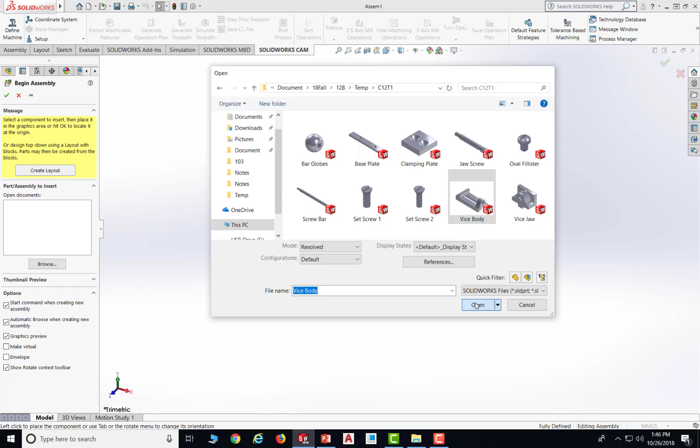Let's grab the first part, the vise body, as our first part, and say open. Now SolidWorks is going to ask us to drop the first part. Whenever you drop the first part, that part is going to be fixed, which means fully defined. So the position of the part is going to be fixed and you cannot move it anymore.

So this is our first part. I just click and put it here, and this part is going to be fixed. As you can see, it has an F in front, meaning this is the first part and we make it fixed.

Now let's grab another part to drop it in. But before we do that, let's take a look at the step to see where we are and how to assemble. This is the part we just put down. Next, we're going to select this part and put it in there, and assemble this piece onto the body. So let's go back to SolidWorks and bring in that part.

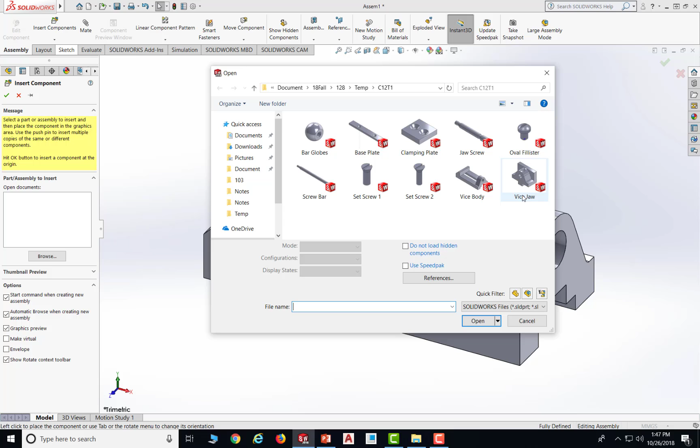So we go to assembly and select insert components, or you could use the drop-down here for insert components. It will pop up the same folder automatically. Now we are going to bring in the vise jaw, say OK, and drop it anywhere. We are going to add mates so the part becomes fixed. As you can see, it has a minus sign in front because it's underdefined, so we are going to add some mates to make this part fully defined.

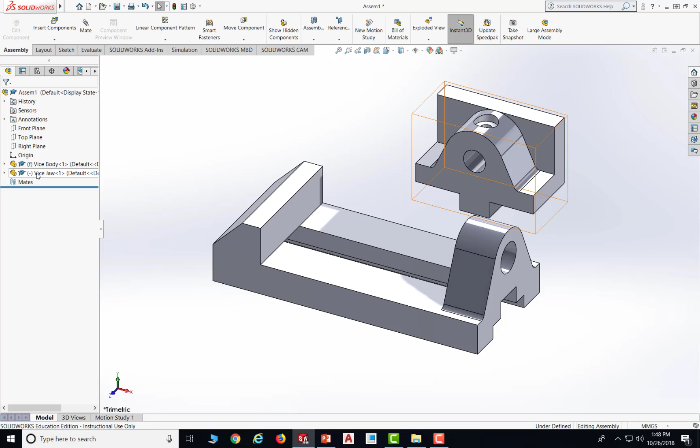First, let's make the two surfaces mate together. We are going to select the bottom surface here and mate it with this surface. Then we are going to select this side surface and mate it with this surface. Then we are going to give a distance so the part can only move from here until this edge. So we are going to go ahead and give this three mates.

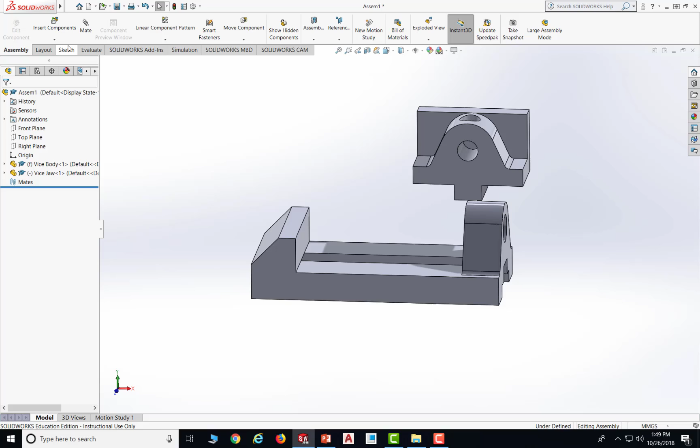As the first mate, there is a mate option under assembly. Click mate, and now select the surfaces. Like we said, we are going to mate the bottom surface here with this surface. So let's go ahead and select these two surfaces.

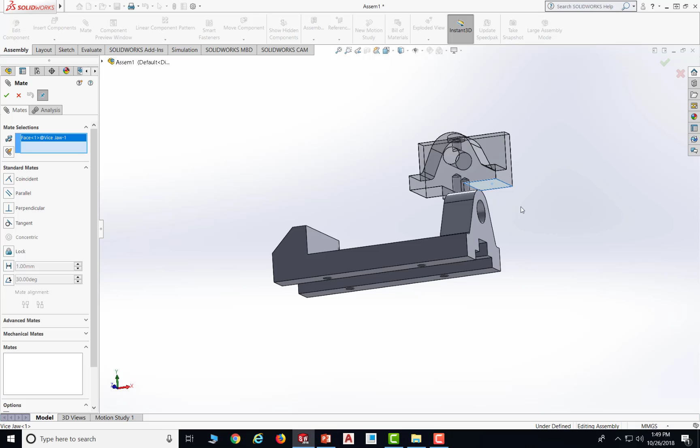Before you do that, make sure this part is dark so you can select the surface. I am going to select the bottom surface as well as this surface. Now they are mating up, and say OK for this.

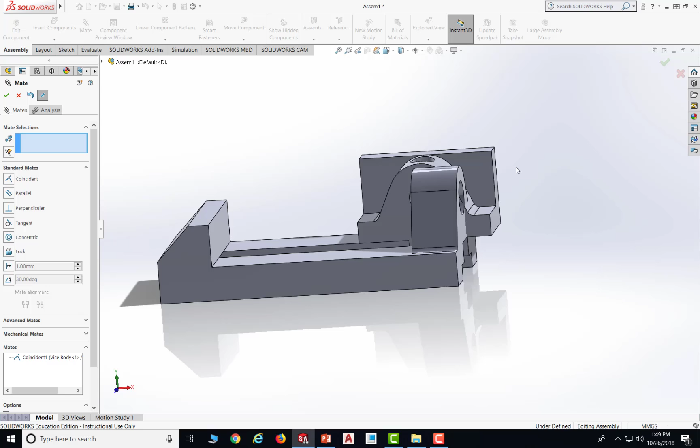Then I am going to create another mate. The mate option here is highlighted, so I am going to select it. By doing that, the part can still move in this direction because I only had one mate so far.

Next, I am going to mate this surface with this surface. I'm going to click this surface as well as this surface, and say OK to this mate as well. By doing this, the part can only move in this direction and can't move front and back, only left and right.

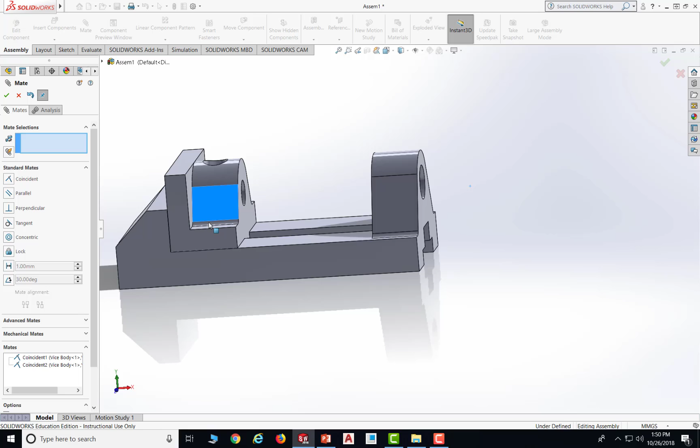The problem is it can still move out, so we need to add another mate to make the part only move within these two distances.

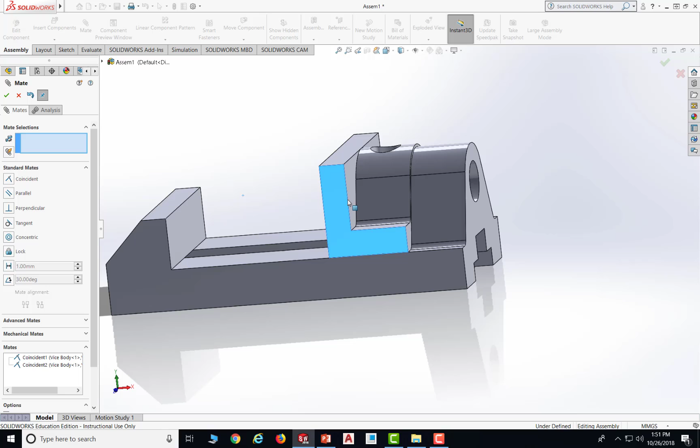Let's go ahead and select another mate. This time, I am going to select this surface with this surface and set the distance so it can only move up to here. Let's select the surface, this one, and the other one here.

Now let's go to the advanced one. There are the advanced mates.

Let's open this up and go to distance. So there's a distance here.

You click that distance and it will have you input the smallest distance and the biggest distance. The smallest distance between these two surfaces is going to be 0, so let's tap 0 there. The largest one is going to be until this position right here.

Let's figure out the dimensions. If we go back and look at the dimension, the maximum one is going to be 144 minus this thickness, which is 16 plus 10, and minus this distance, which is 22, and minus the thickness of the vice jaw. Let's take a look at the jaw - the thickness of that is 32.

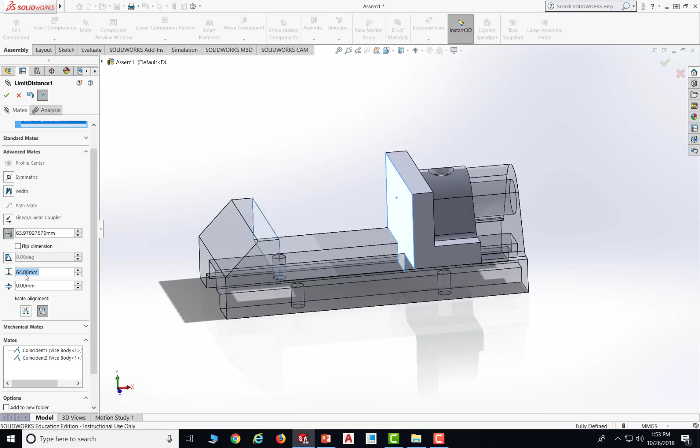So let's put all those dimensions there, which is 144 minus 26 minus 22 and minus another 32. Let's go ahead and put this number there as our maximum: 144 minus 26 minus 22 and minus 32, say OK. Say OK for this mate. So the minimum distance is 0, the maximum is 64, and say OK.

Now we can take a look at this part. The part can only move within this space. If you noticed, actually here I made a mistake when I did the sketch, right?

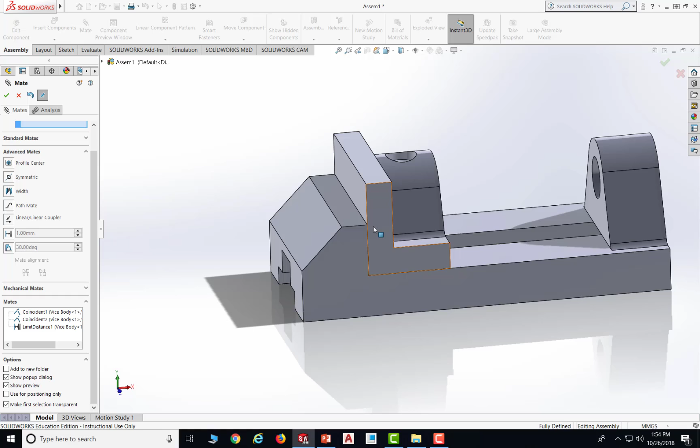Before we do that, let's save the work first and say OK to the mate. Save the work first, rebuild, and save. When you save, make sure you save it in the same folder as all the parts.

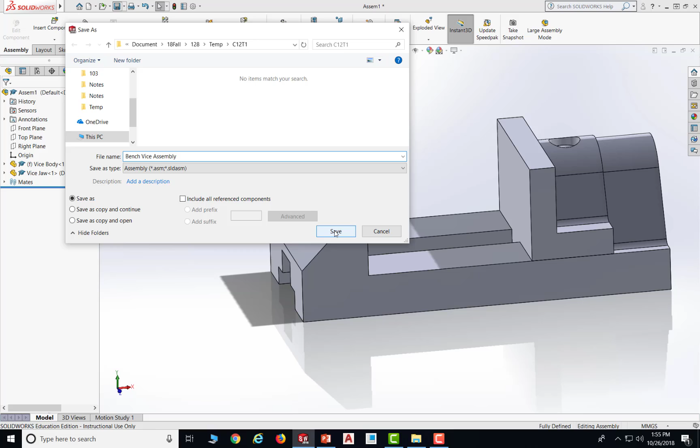Now let's go ahead and change this part. So we go to SolidWorks and open the previous one. Click open - this was the part of the vice body, say open. And this is the part.

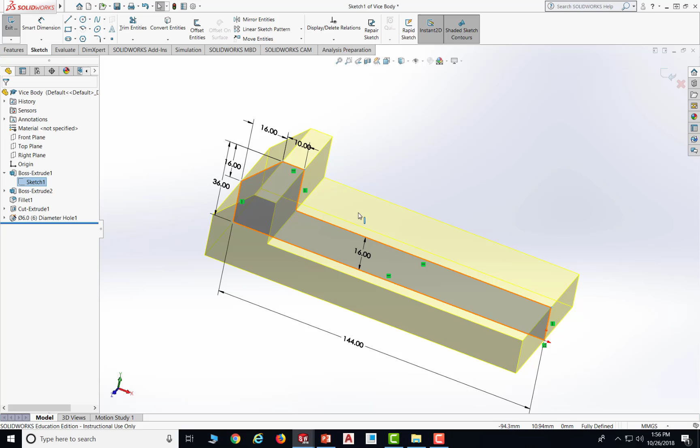Actually, I messed up the dimension there. It's under sketch 1. So I click sketch 1, go to sketch, and select the sketch. Now let me go to the front plane so we can see it better.

So actually the 36 here, I messed up. If we go back, the 36 should be from the top until this line. What I did was from the top to the bottom - that was my mistake.

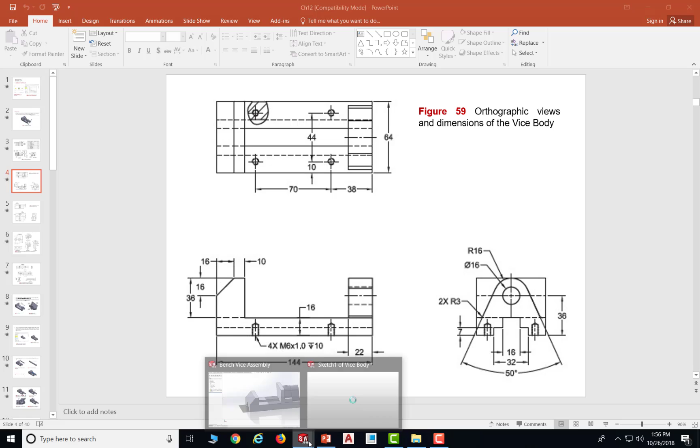So I am going to go ahead and change this dimension from the top until this surface instead of all the way below. Let me go back here and delete this dimension. So this dimension is deleted, and go to Smart Dimension and redo this part and make it 36, and say OK for the dimension.

Then save the work, and it will ask us to rebuild - just say OK with that. And let's look at the new part.

It looks like this, it has a line there. So let's save it one more time and click the sketch maybe and save it one more time. Then that line disappeared, and this is our new part.

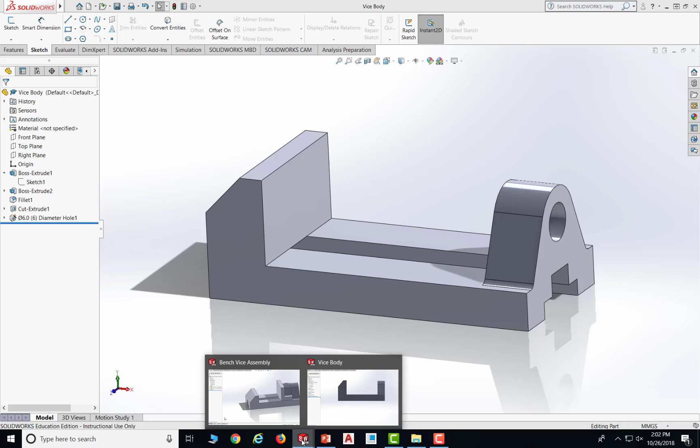Let's give it a good view and save it. Let's go back to the assembly, and it will ask us to update and rebuild - say OK with that. And the part gets rebuilt. Now they have the same height.

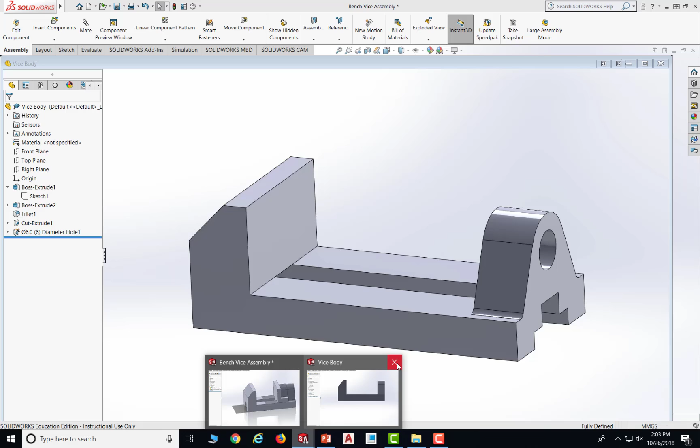Now let's continue. Before we do that, let me close the vice body part because we don't need it anymore, and let's look at what's the next step. So we completed this.

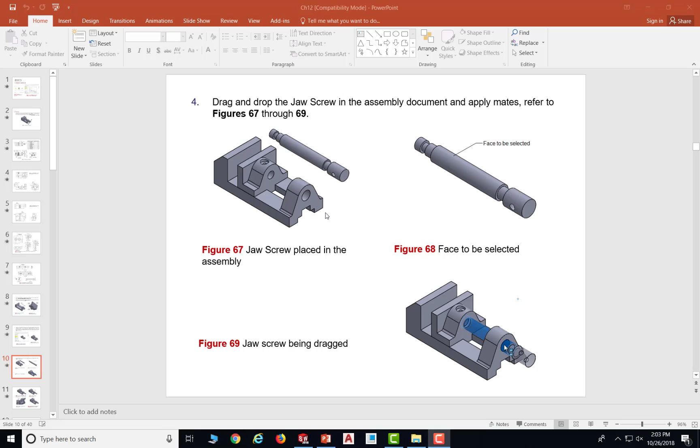In the next part, we're going to bring this part and insert it into this hole. So let's go back to SolidWorks, click insert components, and find the part. Actually, the jaw screw is the thing we're looking for - don't select the screw bar, that's for something else. Select the jaw screw, say open, and drop it off in a random place that you like.

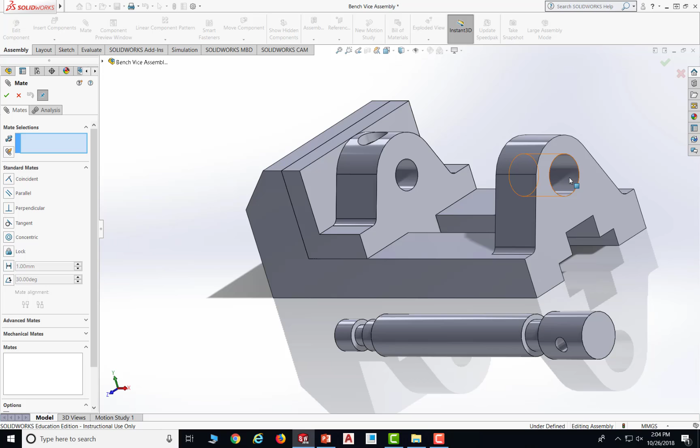Now we are going to put the mates. Let's click mate, and we're going to make this one and the hole concentric. Select this as well as the hole, which is automatically recognized as concentric, and say OK with that. With that, the part will only move in the center of the hole.

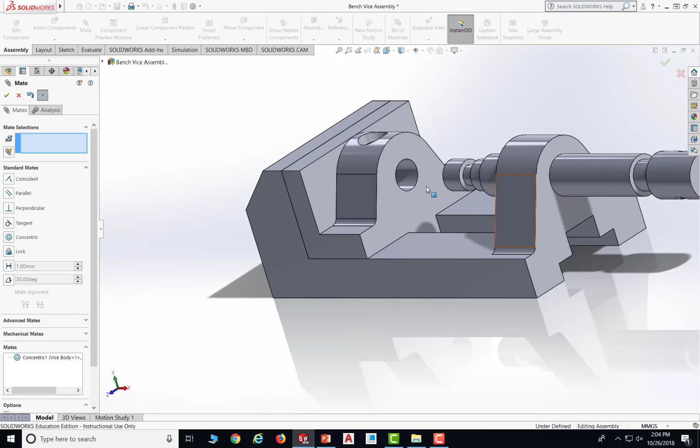Next, we're going to make the bottom, the inside surface, coincident with the surface. So let's select this surface as well as the inside surface, and this is the surface. Make them coincident, which is recognized automatically, and say OK with that, and OK with the mating part.

Notice that by doing that, the vice jaw, which is this part, is fully defined - it does not have a minus sign in front. The vice body, like we said, is the fixed part - it's the part we brought in first, so it has 'fixed' in front. But the screw, the jaw screw, still has a minus sign there.

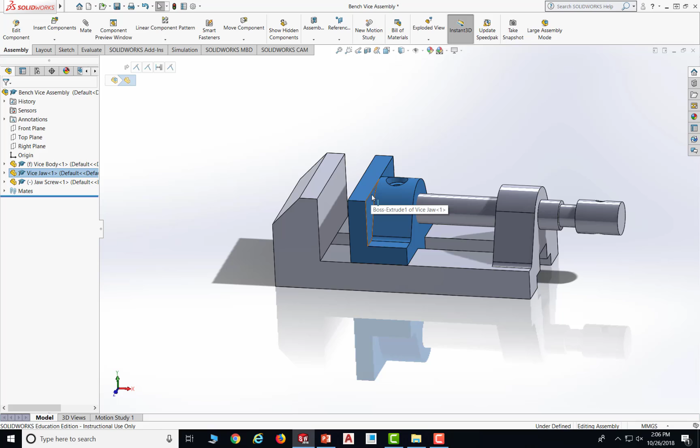The reason for that is we gave two mates there. The bar can still move, as you can see - it can rotate. This is what this part is actually supposed to do in reality. So we are not going to force this part to be fully defined, because in reality we're supposed to have this motion, so we'll just leave a minus sign there.

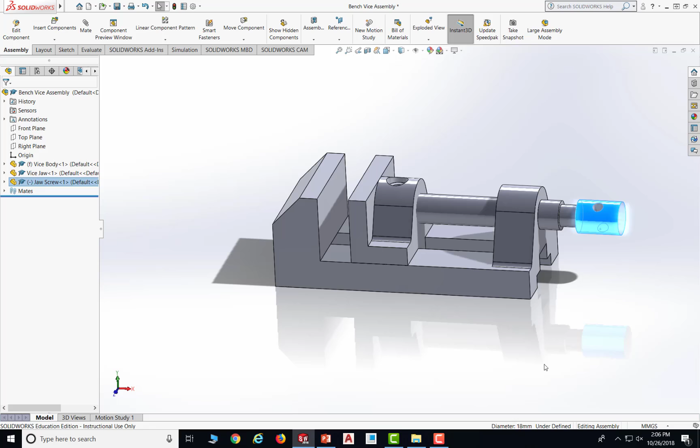And if I grab the bar, I can move the vice jaw automatically, because I made them mated together. In reality, it should not be the case - we should have a pin here and put it there. That's the next step we're going to do.

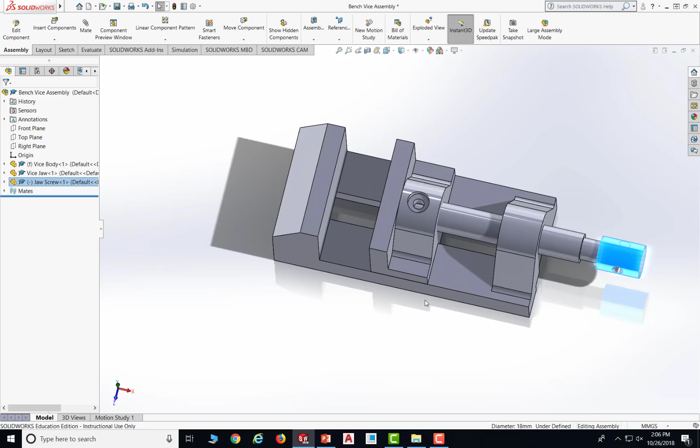Also, with the part you already made, you could check the mates that you did. For example, for the vice jaw, expand that, and all your mates are going to be here - all the mates that you did.

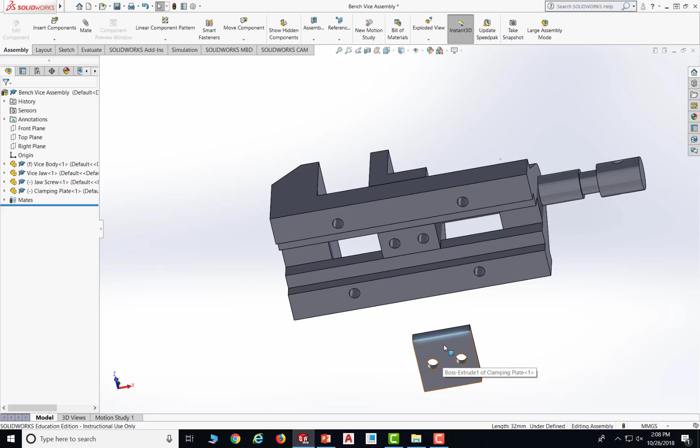Now we are going to put this part in here. Like I said, it has a direction, so this surface is supposed to go right here, with the other surface facing out. So let's go ahead and put it there.

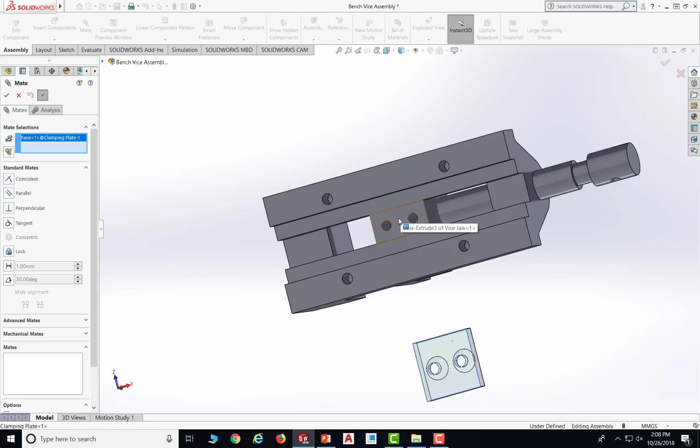I am going to add a mate one more time. Select this surface, the edge - no, this is not what we want. Delete that, and select the surface, and select this surface - coincident. Actually it's recognized automatically, but as you notice, the direction is wrong. So let's flip the direction by clicking this button. Okay, flip the direction, click this button - the part is flipped around. Okay, so this is the right direction.

Now we say okay. Next, we are going to add concentric relations. These two holes are supposed to be concentric, and these two are supposed to be concentric as well. Let's select this hole as well as this hole, and say they're concentric - actually it's automatically picked, so say okay with that.

Let's add another two, which is this hole as well as the other at the bottom, and they are concentric - say okay as well. By doing this, the piece is actually there, so it can move with that.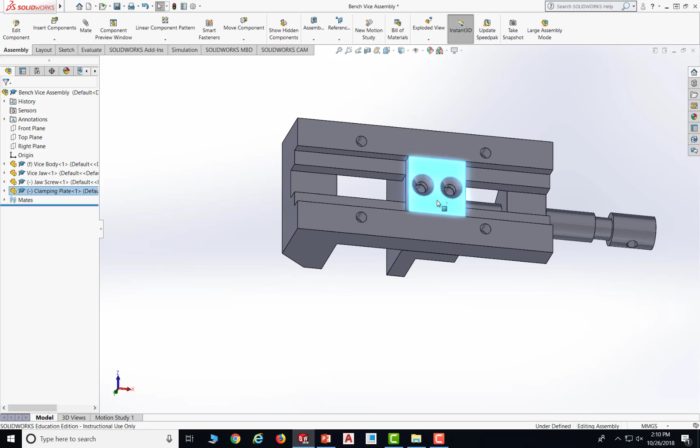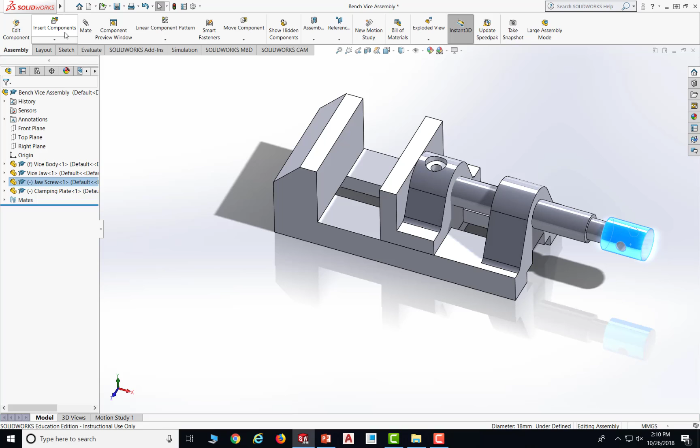And now let's look at the next step. We're going to put this fastener on there. So let's go back to SolidWorks and flip it over first. Then insert components, select oval fillister fastener instead of the other two. Select this one, open it, and drop it down here.

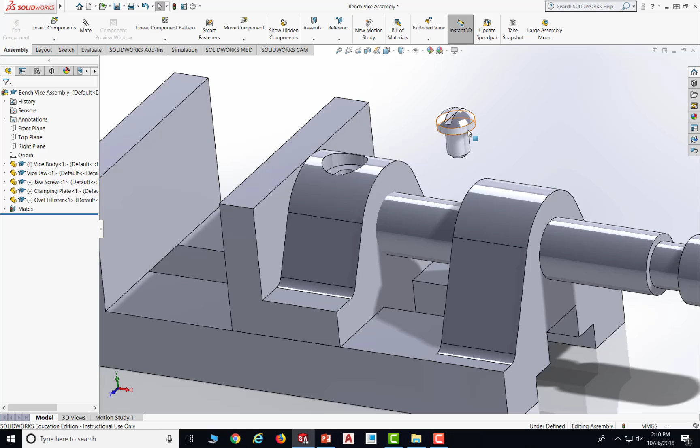Now we are going to add relations. We're going to make this surface and the bottom surface coincident. Add a mate, select the bottom surface and also this surface, and say they are coincident, which they already are. Next, I'm going to make a concentric relation. Make those two holes concentric, select the cylinder and this cylinder as well. They're concentric already, and say OK.

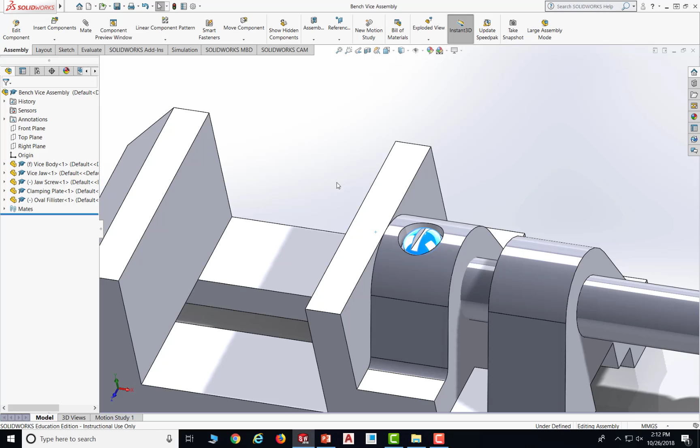By doing this, I put the fasteners in there as well. As you may notice, the fastener is underdefined because I can move it and rotate it this way. Now let's save the work and rebuild. Now the clamping plate at the bottom is fully defined as well, as we rebuild. So it's fully defined.

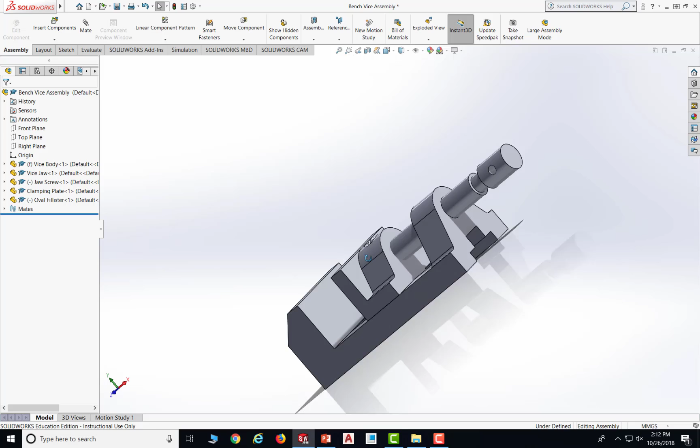Let's move to the next step. Go to the slide. Now we are going to add the 4 fasteners at the bottom, set screw 1 instead of 2. Let's do this first. Let's go to SolidWorks and flip it to the bottom. Insert the component, select set screw 1, and say OK.

Now we have 1 fastener here, and we're going to mate that. But before we do that, I think we missed a step, which is to put those 2 pieces there - those 2 bottom pieces. Let's go ahead and do that first. Go to insert component and grab the base plate here, say open, and let's drop this piece down first.

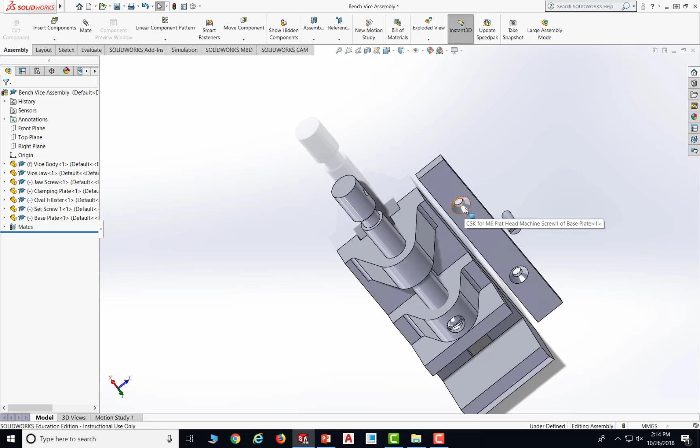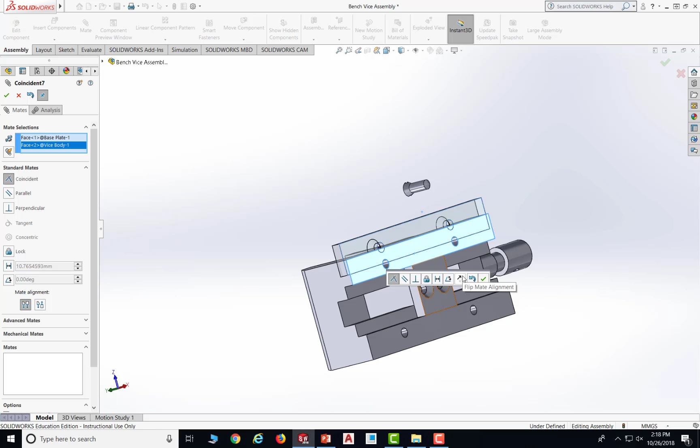Let's mate it together. Let's see if it has directions - yes it has. This one is supposed to mate on this surface because the other surface has countersink bores here. So let's be careful of the direction. Let's go to mate and select these 2 surfaces. It's the wrong direction again, so let's flip it by clicking this, and now it looks right. Say OK with this mate.

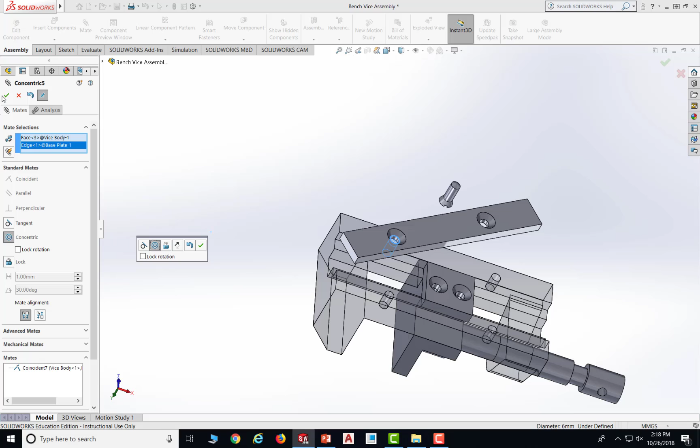Now we are going to make the holes concentric. Select the hole as well as this hole, say concentric, and OK. Select another hole as well as this hole, they are concentric, say OK. Now let's check if it's fully defined. But before we do that, let's save the work.

Let's insert another one. I go to insert component and bring the base plate in one more time, drop it here, and do a mate. Click this surface and this, and see the coincident, which it already is, but the direction is not right. So let's flip the direction by clicking this anti-aligned, and say OK.

Now we are going to make the holes concentric. I am going to select this hole as well as this hole, and they automatically recognize the concentric. Say OK, and select this hole as well as the other one. Now I can't see it, so I'm going to select this one because they're the same, and say OK with that.

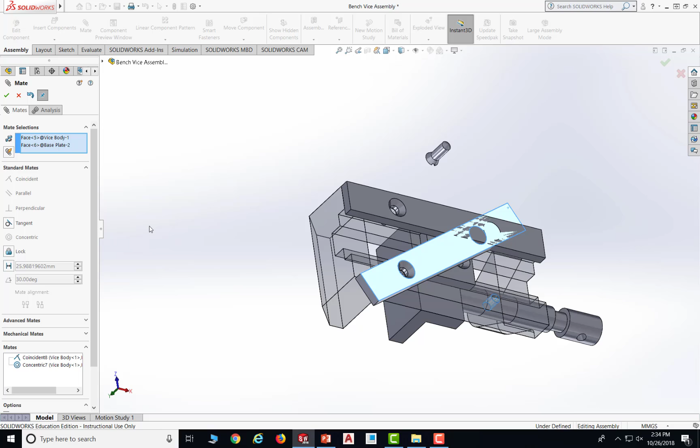Doesn't let me do it. Okay, so let me cancel this mate first and move this part so I can see it. Let's go back to mate one more time, click this circle as well as this, and it's concentric. Say OK, and now let's say OK to the mate and save the work.

As you can see, both of the base plates are fully defined. Now we are going to put the fastener that we just brought in inside of the hole. First of all, we can make it concentric, and also we could make this face mate this face, but for some reason it's not going to work.

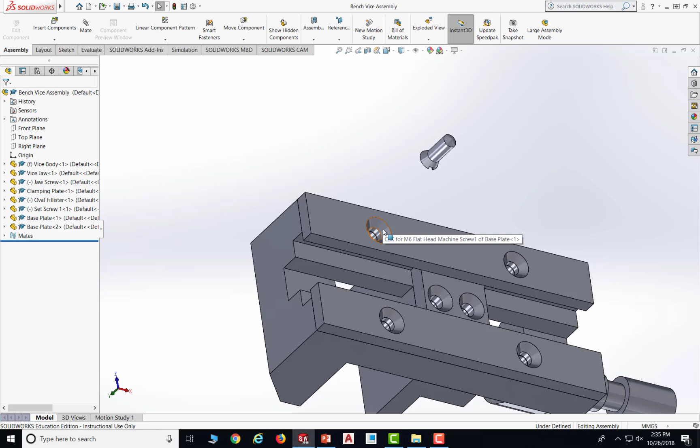I think it's because the geometry of the fastener is not the same as this hole, so they're not 90 degrees, I think. So what we're going to do is make this surface mate to the bottom surface there, see if it will work. We do mate and select this surface as well as the bottom surface, check the direction - looks right to me - and this is coincident, say OK.

By doing that, the fastener should still be able to move left and right. Oh no, it's not, because the shape of the part has a groove in there, so it's got to be in there. We don't need to put concentrics anymore, because that's not a flat surface. It has a groove, so this is the only way it can fit in.

So that's all, but the part should still be underdefined, because as you can see, I can move it. And in reality, we do not need to fix this, so we'll just leave it this way and say OK with it.

Now we could bring the other 3 fasteners in there and add relations or mates individually, but we have a shortcut, which is we do a pattern. Linear pattern. I am going to select this fastener and do a linear pattern here, so I don't need to bring each fastener individually and add all the mates individually. I am going to go to linear component pattern and select it.

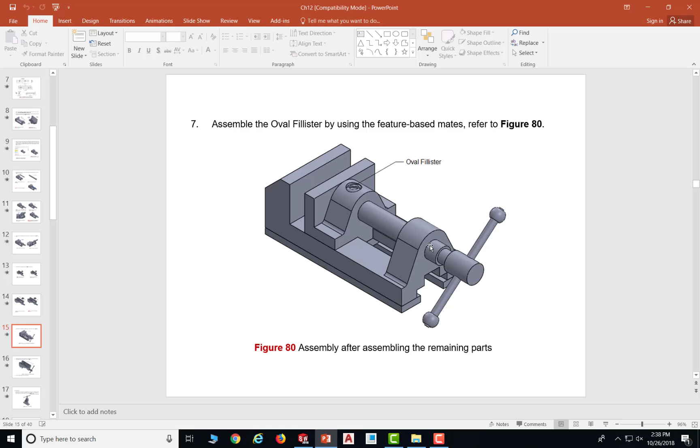Oh, before we do that, let's give a distance. So let's figure out the distance between these 2. Let's go back to the drawing and look at the dimension. The dimension in between is 70, and let's figure out the other dimension as well. The other dimension here to here is 44, so 70 and 44.

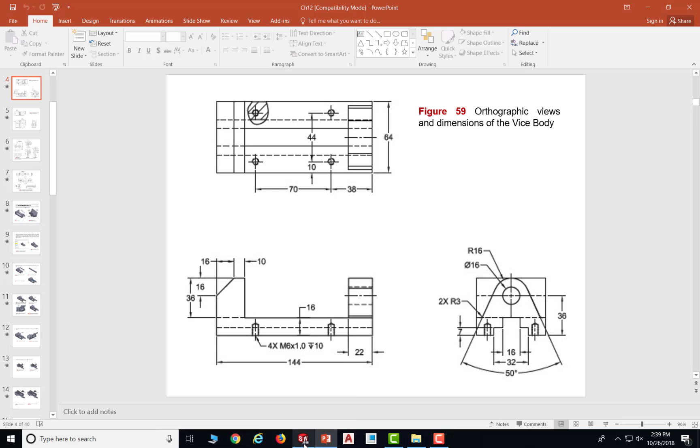So let's go back here and give a dimension of 70. This is the preview, looks right to me. And let's give a direction 2, so I am going to do a pattern in this direction.

Let's find a vertical line. This is a good one, so this is a vertical line. I select that, and by selecting that, the arrow points out this way, which looks right to me. If it's not, then you could flip the direction by clicking this. As you can see, the arrow is pointing out another way, so this is right.

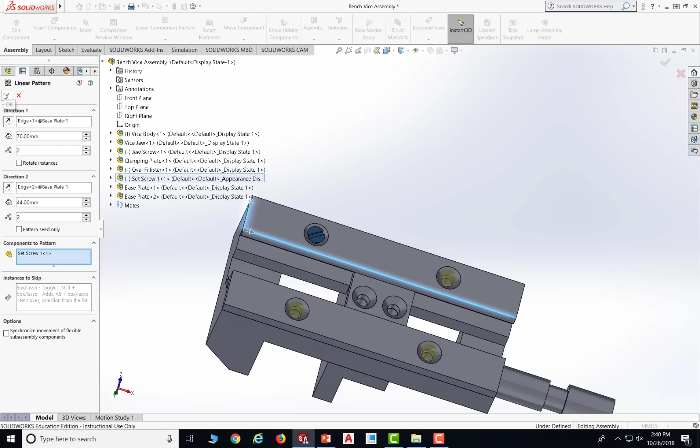And the distance was 44. We want to have 2 of them, so 2 here, and let's look at the preview. 1, 2, 3, 4 - we have all of them in the right position, and we say OK for the linear pattern. Now we have 4 fasteners there since it's a pattern.

So if I rotate one, all of them are going to rotate together, and they are all underdefined because they can rotate - we have not given a dimension or relation between here and somewhere, which we don't need to. Let's see what we are going to do next.

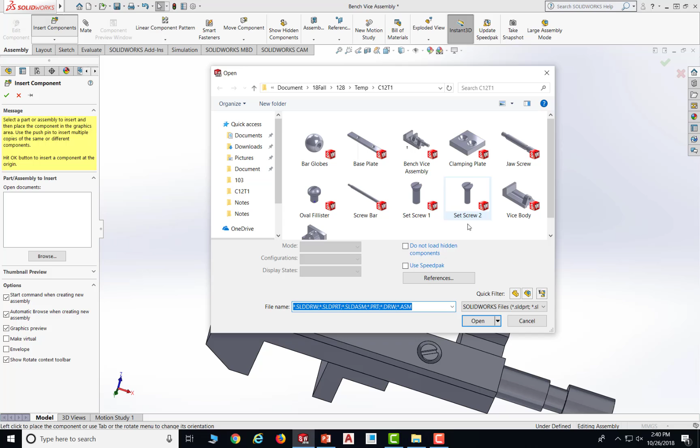So next, we are going to add those two screws as Set Screw 2. Let's go back to SolidWorks, insert component, select Set Screw 2 here, say open, and drop the screw down here and let's do a mate. Select this surface and also this surface, and let's check the direction. Yep, looks right to me, say okay with that, and that should be all we need.

Oh, it's not, it can still move out. I guess I selected concentric instead of the mate. So let's go ahead and fix that.

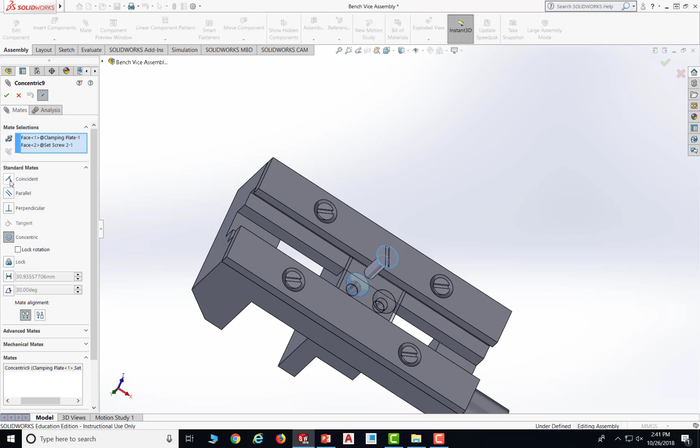So, screw 2 here, and mate in bench vise. This is concentric, so let's right click and edit that. Instead of concentric, I want them to be coincident. I'm not able to make the selected entities work, maybe because the surfaces are different, they're not exactly the same. So let's say no for that, and delete this relation, this mate, and redo it.

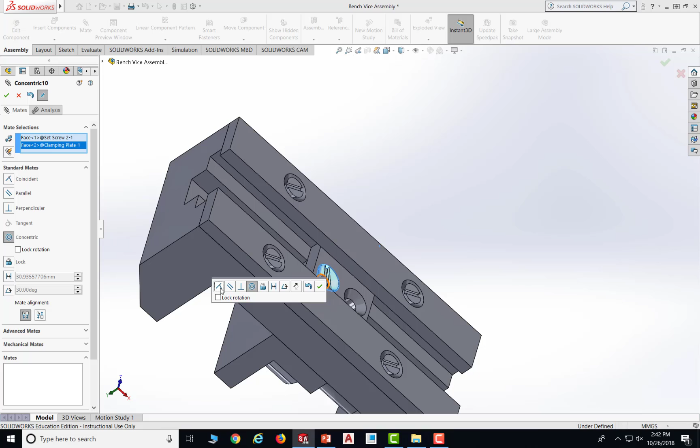See if we can. If we still can't, we're going to mate the bottom piece like we did for this fastener. So let's go to mate and select this surface and this surface and see coincident, still can't. Okay, then we're going to do something else.

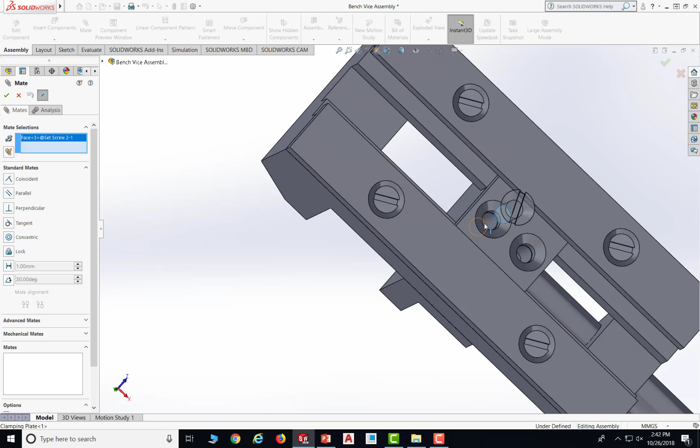We're going to select the bottom here, the surface as well as the inside surface. Can't see it very well. So the inside surface, which is this, and say they're coincident. Okay, coincident, and say okay with that. And now they are installed there.

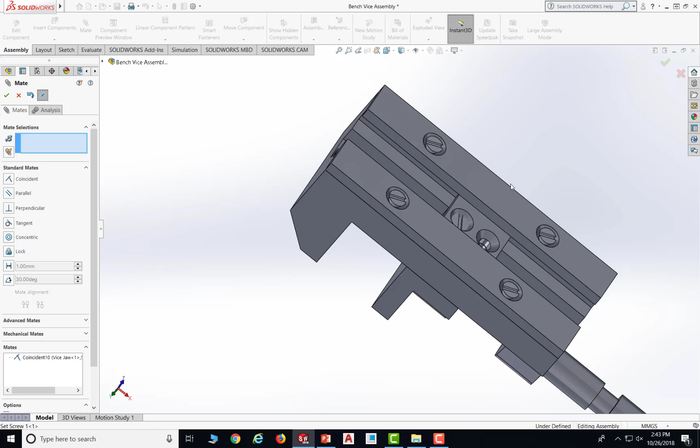So the reason it can't be mated is because the shape is different. As you can see, they are not exactly mated. Anyway, so we'll make the bottom part to be mated, and the same thing, we're going to do another screw.

So we insert the component one more time. It's a set screw 2, say open, and drop it here, and do the mate. So the surface here as well as the inside one, make sure select the surface only instead of the hole, and the direction looks right, and say okay. And now the screws, they are there.

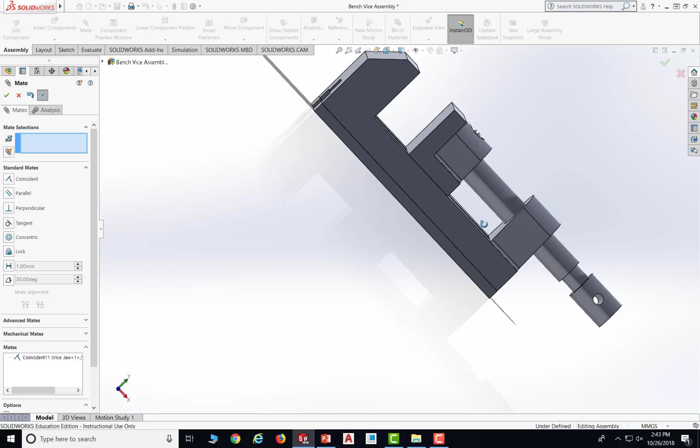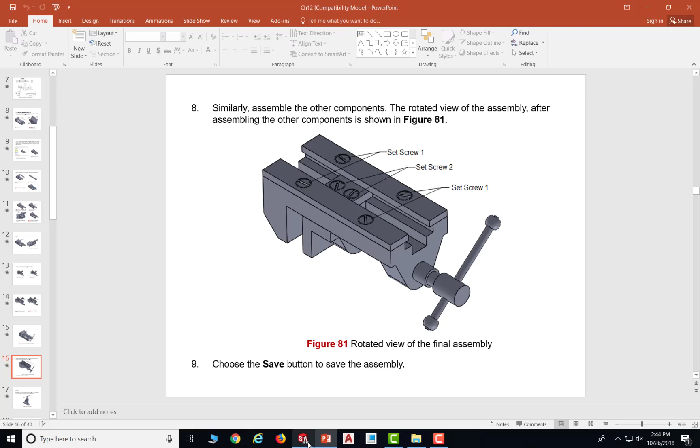Let's go to the next one. We're going to install this part as well as two little balls at the end. So let's go to SolidWorks and say okay for the mate, and insert the component, and select the jaw screw, and open it, and drop it down here.

And now we are going to make this bar as well as a hole to be concentric. Before we do that, let's save the work first and rebuild the part. Let's go to mate and select the cylinder as well as this hole and make them concentric, and say okay. And now it can insert in there.

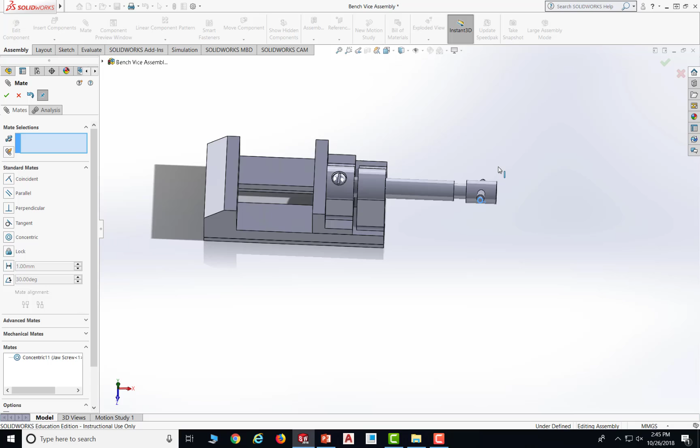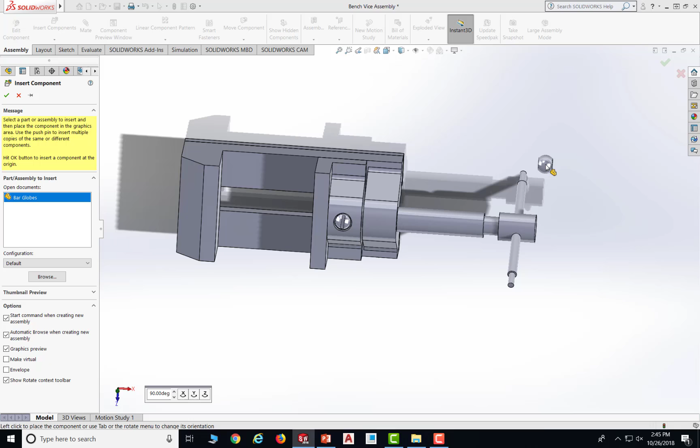Now let's bring the two little things. So say okay with the mate, and insert component, and bring the bar globes. Say open, and put it here. And when you install or assemble this part, make sure it has a direction.

So the part that we had chamfer there, they're supposed to be inserted in. That's the reason we put a chamfer, because it's easy to install. So we are going to install the one with the chamfer in.

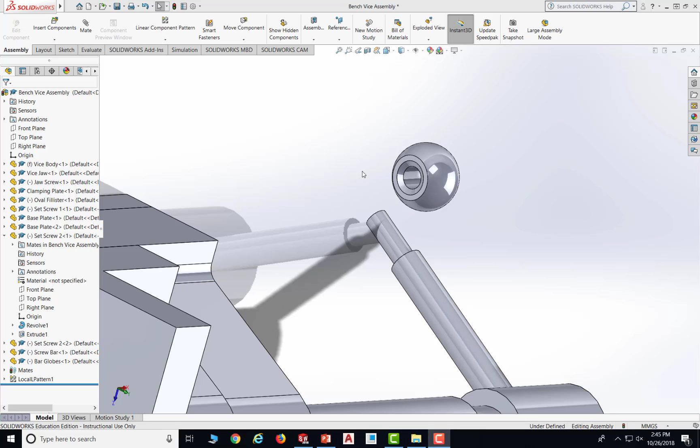Let's add a mate, and we are going to put these surfaces to be coincident. Let's see if we can do that first, because the shapes are a little different. So let's select this tool, see if we can do that first, and see they're coincident. Yeah, we can do that.

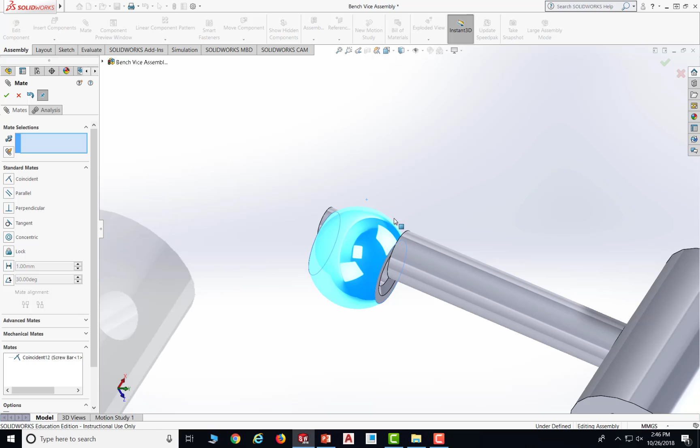That is great. Then say OK with that. By doing that, this part can still move in this way. And now we are going to add a concentric relation. So we select this cylinder as well as the other one, say they're concentric, and say OK. Now the part can move.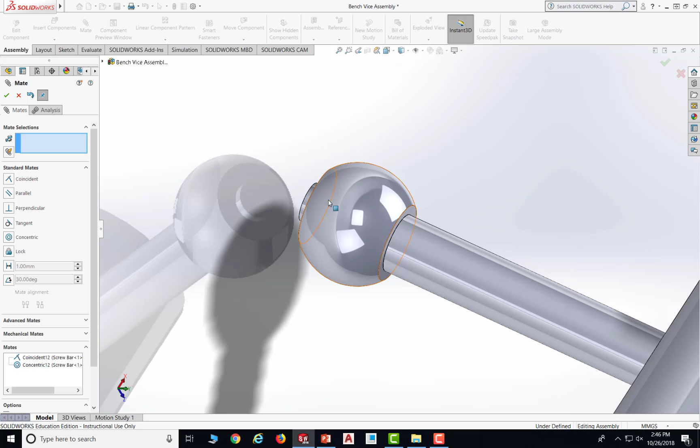And actually it can still rotate in that way. So this part, it can still rotate, and actually in reality it's supposed to. So we just leave it in there.

And let's put this part one more time on the other side. So bar globes, and say open, and drop it here, and make sure you assemble this part in. That's the reason we put a chamfer there.

So go to mate and select the surface as well as the surface in there, and coincident, which is right, and say OK. And now we are going to add a concentric, which is this bar and this bar, and they are concentric, and say OK. And we have this part.

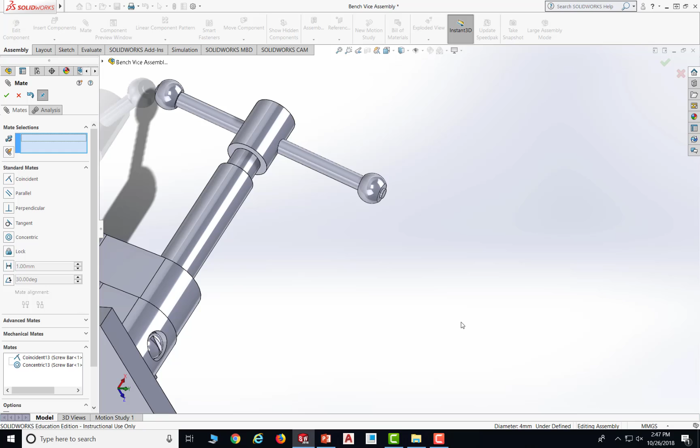Now let's give a good view and see what's going to happen. And put it here, and make it a little bit lower so I can rotate it.

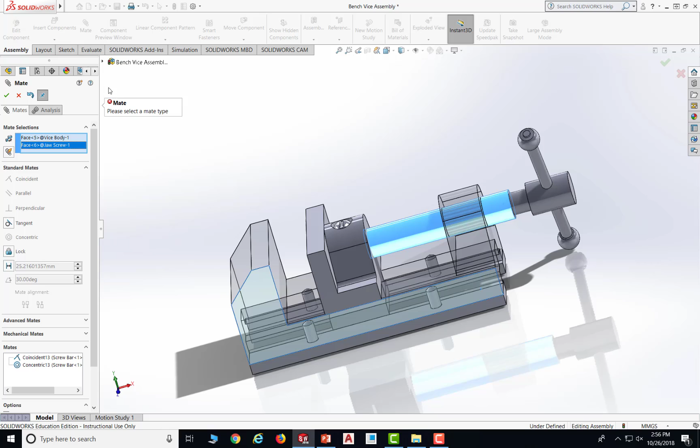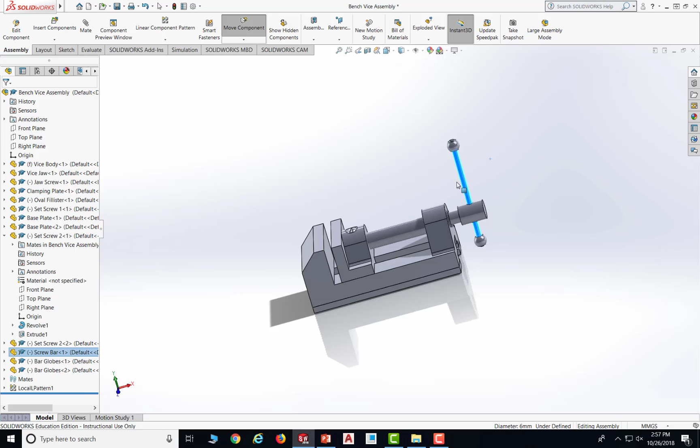So first, say OK for this mate. Oh, I didn't select that, just exit. Let's move it - OK, and this is what's happening. It can actually go out and come in, and this is not in reality what is supposed to be happening. So now we are going to give another constraint which makes it only work in there without coming out.

So let's do another one. Let's give an axis of that and create a plane so it does not go out, and give a distance so it does not move out.

So I am going to create some axes. I'm going to select reference geometry and do axis. First, I want to get the axis of the cylinder, so I click that and create this axis and say OK. By doing that, I create axis 1.

I also want to create the axis of the cylinder, so I do reference geometry and select the axis, and select this geometry as well. The axis is already there, which is good, and I say OK with that.

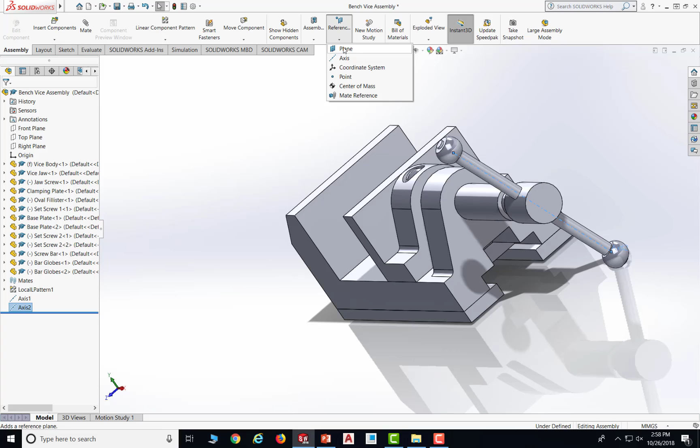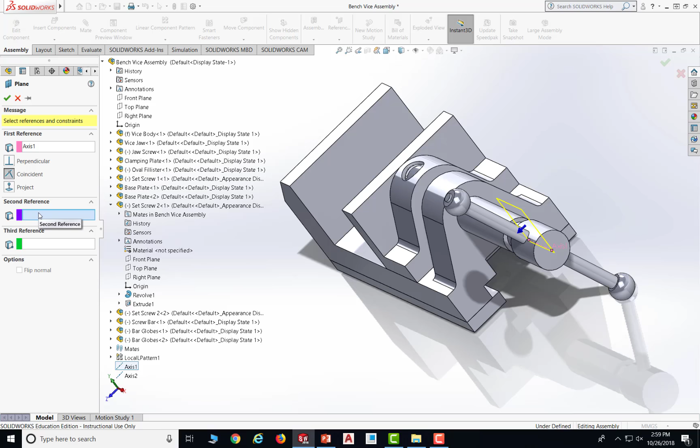Now I am going to create a plane that goes through axis 1 and also perpendicular to axis 2. So first reference, I select axis 1, make it go through, which is already done. The second one, I select axis 2 and make it perpendicular. So this is the plane I'm trying to create, which goes through axis 1 and perpendicular to axis 2, and say OK with that.

Now I am going to give a distance from this edge, so it tells that it can only move from here, and from 0 there, and the farthest one is going to be the length of the entire part, but subtract the radius of the circle.

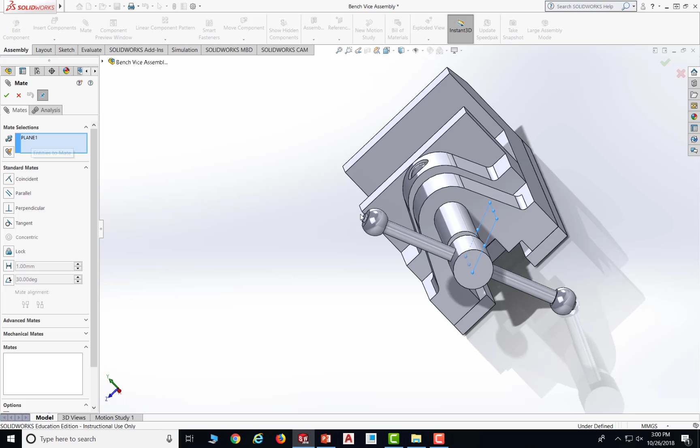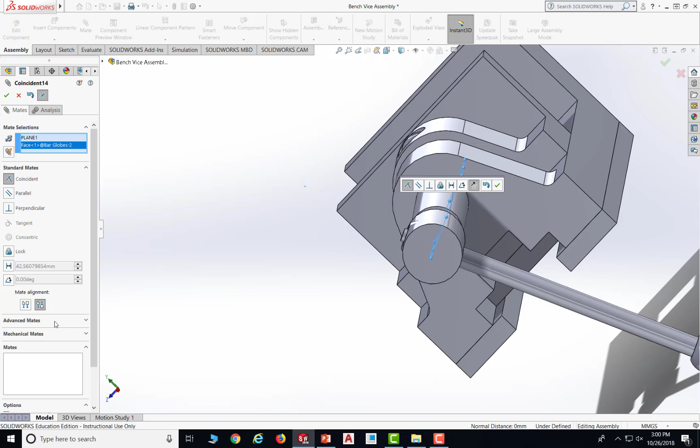Let me give another mate with that. So go to mate and select the first plane, which is right, and also select the edge of this little piece, so this ball, and give a distance. The smallest distance should not be like this - first I go to advanced mates, click distance, and the smallest one is going to be the radius of this part. So let's go back and find out the radius of that part.

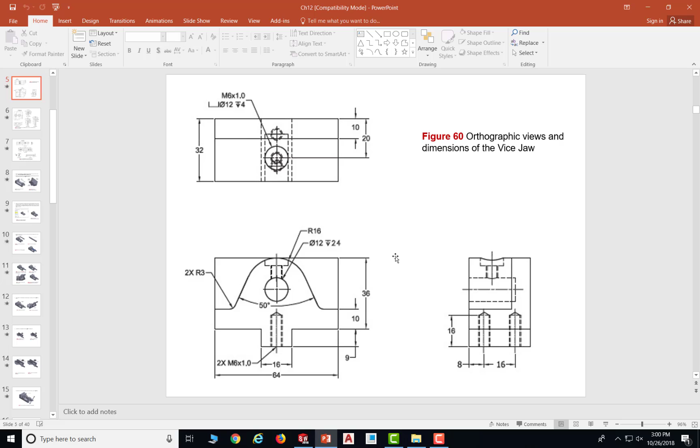It's going to be the bar. So the distance is going to be 10 as the radius. So we go back here and tap the radius as 10.

And the largest one is going to be the overall length of the bar, subtract those two sides, and also subtract one of the radius. So let's go ahead and figure out that: it's 104 minus 10 minus another 10, and minus this 10 there.

Oh, I think I made a mistake. So that's not the radius. The radius of the bar should be this - so radius is 9, okay, radius is 9.

I'm going to go ahead and fix that as well. So the maximum is going to be 104, subtract 10, subtract 10, and subtract 9. And the smallest one is going to be 9. So let's go ahead and put it back there: 104, subtract 10, subtract 10, subtract another 9, and the smallest one is going to be 9.

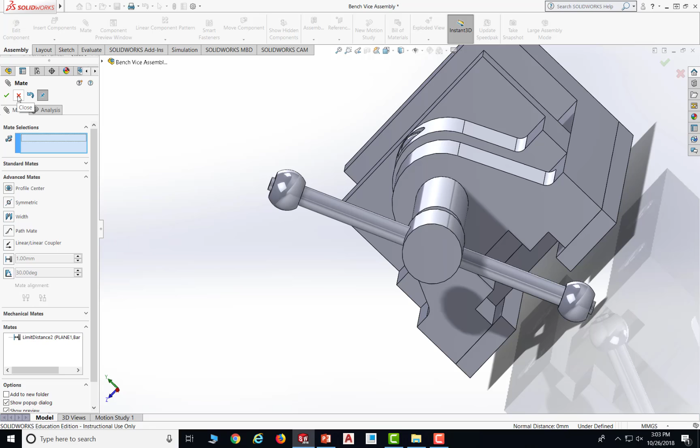Say OK with that. I don't know if it put it there - say OK with that, and close the mate to see if it works. Yeah, actually it works, right? So it only moves in between.

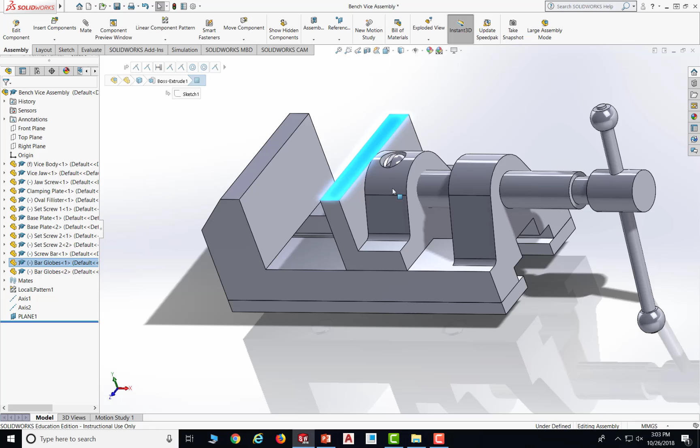Let's flip it to the front view, and we could move this part up and down, and also move this part in and out. Let's save the work first and rebuild.

By doing this, you should have the vice body fully defined or fixed, and the vice jaw is fully defined, no minus sign, and the clamping plate, which is the bottom piece, should be fully defined as well. Also these base plates, this two, they should have no minus signs in front. And all the screws, you will have that because you can still rotate them. Also this part you can rotate as well, but you can only move it up and down in certain dimensions, not all of them.

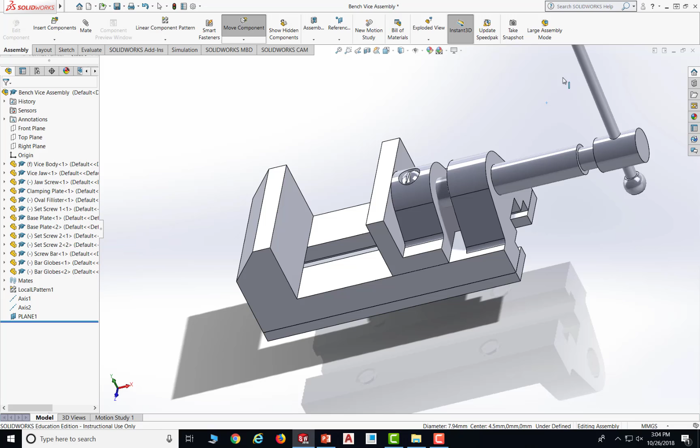If you get the same thing with me, then you're all set for this part. Let's give a good view, and I want the isometric view. Give a good view once again, and save the work, and rebuild it and save it.